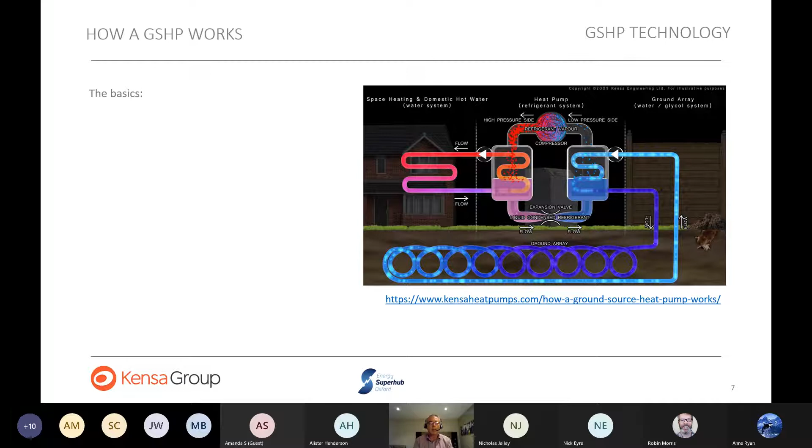So if you were to compare that in terms of standard efficiency, if you think of a gas boiler, for instance, if you're doing really well, for every 1 unit of gas that you put in, you'll get sort of 0.9 units of heat energy coming out. So you'd call that 90% efficiency. So on the same scale, a ground source heat pump would be 400% efficient. Now they do range depending on what you're trying to heat and what heat pump it is. So it's really somewhere between 300 and 400% typically.

As a scientist, having percentages more than 100 can be a bit confusing at times. So they quite often call it a coefficient of performance. That's just the heat out divided by the electricity consumption. So your COP, coefficient of performance, would be between 3 and 4.

The ground then is gradually recharged over time. What you'll normally see in a ground source heat pump system is the temperature dropping slowly through the winter as you extract it out of the ground and use it for heating and hot water. And then during the summer, although you're doing hot water, you normally size a system so that the ground is actually recovering all summer long. And then you just get into this annual cycle of cooling down gradually over the winter and reheating back over the summer. And it's actually diffuse solar energy that's going into it.

So a lot of people will mix up ground source heat pump technology with geothermal, and in America they actually call it geothermal, what we would call ground source. In the UK, the definition is if you're taking the heat from deeper than 500 meters, then it's typically called geothermal. Shallower than that is called ground source.

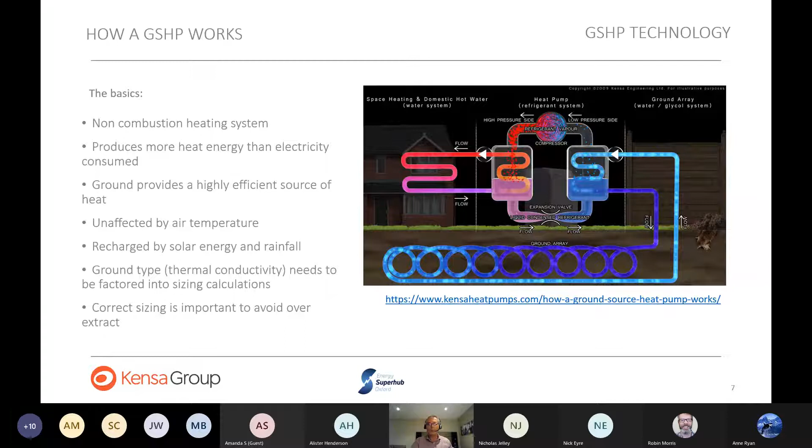And then that's what's used to provide the heating and hot water. It's very well suited to self-build. This is actually cheaper and easier to do when you're putting the system in rather than trying to retrofit. It's often when you're out in the countryside, so you haven't got access to the mains gas.

So for the longest time, and still to a certain extent, mains gas is the cheapest way to heat a property. It's not low carbon, and it's not necessarily healthy, but gas is still very cheap. It's still considered one of the cheapest ways of heating a building. And if you're out in the country, you've got access to a lot more space. So if you're putting in ground collectors, you've got space to do that.

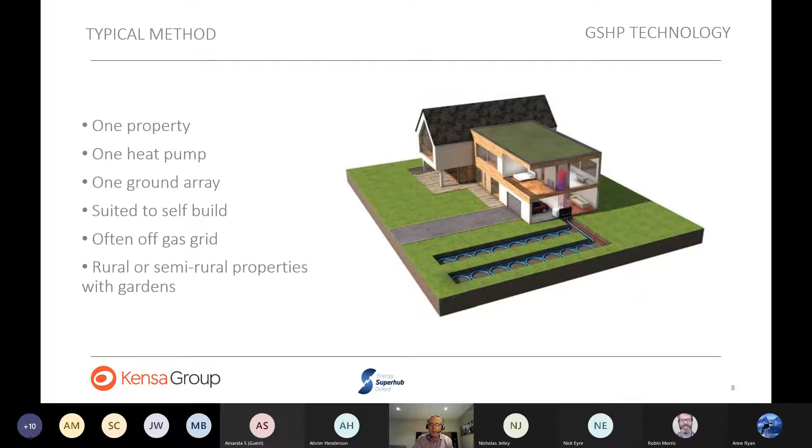So that's the long history of ground source and Kensa from 99 right up until sort of 2012, 2013. All of the systems were deployed that way. And to be fair, it's still quite a popular way of doing it now. However, it's been overtaken in the last few years by something called a shared ground loop array.

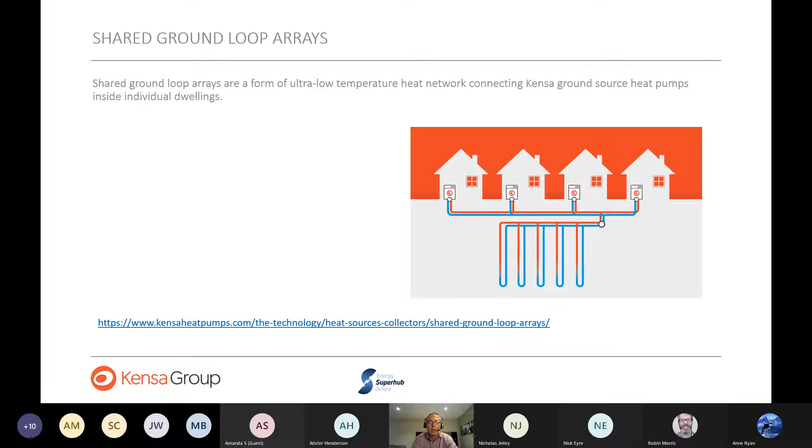And this is where you have a group of collectors, and it doesn't really matter whether that's boreholes or whether it's slinkies or straight pipe or whether it's taking water from a lake or an underground aquifer. There's loads and loads of different ways of getting heat into the network. But the key point is whatever way you choose to collect the energy, ultimately, that's then shared between multiple heat pumps in multiple buildings. Okay, so you can see this example here has 4 properties, each with their own heat pump and connected to 5 boreholes.

When we're doing this in tower blocks, you can sometimes have between 4 and 6 flats per borehole, and they're normally grouped up. So you quite often see a system with 25, 26 flats connected to 5 or 6 boreholes. And it's quite a different way of thinking about it, and there are a lot of advantages. You can scale it up, or you can do it as small as 2 properties.

I've got a system like this in my own house. So my father lived next door, and I've got a field at the back which had a lot of solar in it, and I put very cheap collectors into the field, brought them in, split it off to my house, took it off to Dad's. We have our own heat pump, and that's it. I've got a shared ground array with just 2 properties. Equally, we've got it with hundreds of flats when we're decarbonising tower blocks at a time. So it's a very, very flexible system.

One of the really cool things about it is the heat pumps themselves are connected to the property's own electricity system. So they're just wired into your house like any other appliance. And that means if you whack the thermostat up and open the windows, I don't know why you'd do that, but if you did that, you would then pay more to run the heat pump. So although it's efficient, for every unit of heat you want delivered into the house, you are buying a third to a quarter of that in electricity. So your bill would just go up, and you pay for it in the natural way.

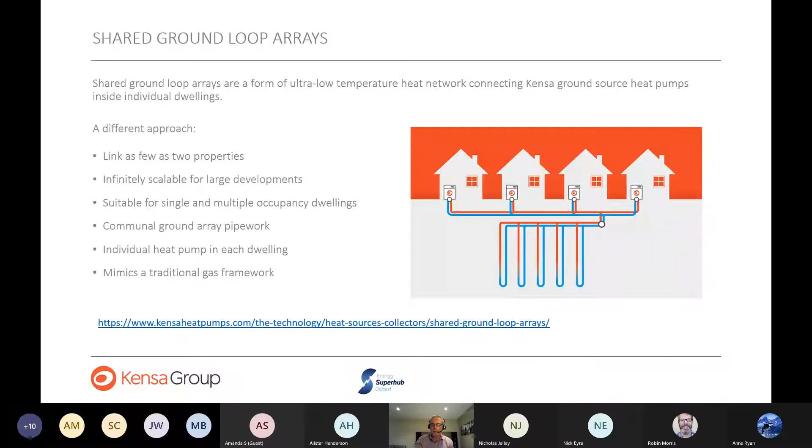So in a gas system, you've got a pipe carrying a low-grade energy, as in a chemical energy in the form of gas, to your white box. A white box then converts that into usable heat, and you pay for what goes into the building. So this is a very similar concept, really, from a financial and business point of view.

There's loads of benefits there, including being very, very efficient. If you're doing the traditional district scheme, you'll be losing heat every time you send it around the neighbourhood. But here, the temperatures we're flowing the liquid in are at roughly the same temperature as the ground, if not slightly below. So a lot of the time you're actually gaining heat while you're sending it around the district, and you're only upgrading to useful temperatures once you're inside the thermal envelope of the building.

A lot of district schemes can actually be, unfortunately, a little bit inefficient, because a lot of the energy they send out of the central plant can get used up by just heating corridors and the like, and the ground, and you have to put quite expensive insulation on it. Whereas the pipework we use here doesn't even need any insulation at all, because it's actually gaining as it moves around. And because of that efficiency, you actually end up with very low running costs.

Okay, so that's what we're doing now. This represents 95%, maybe even more, of Kensa Contracting's work, and over 80% of Kensa's work as a whole. So 4 out of every 5 heat pumps that come out of the factory will end up connected to a shared ground loop array, and we've demonstrated this concept now over several thousand properties, from tower blocks to streets. And if you think about it, a street is just a tower block on its side, or a tower block is just a street on its side, whichever your preference.

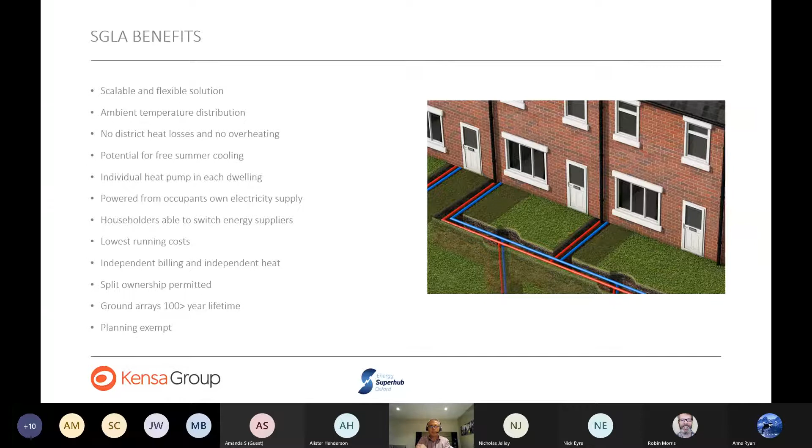So you've got a heat pump that's been shrunk and a hot water storage that's been shrunk, and that enabled this project to go ahead. You can connect the heat pumps to any hot water tanks, but we think this pairing has got particular benefits, especially in flats where space is limited. That's what it looks like.

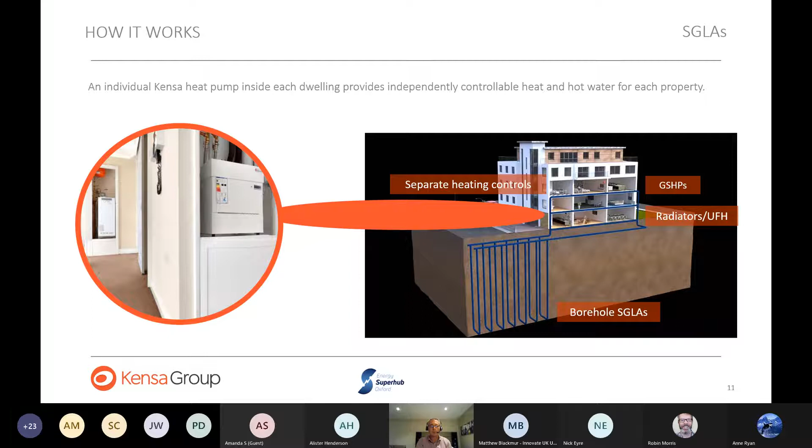So where are we going in the future? We're going to push from shared ground arrays to networked heat pumps. And a lot of it is exactly the same. So the core of it is a network of pipes, property, each building, each heat pump, that are sending heat around the district at low grade, at what we call ambient temperatures, which we're defining as anything between 0 and 20. You could probably stretch it from -5 to +25, full range.

And the key when you're sending heat around the district at those temperatures is that you're not losing it. Because it's ambient, because it's in sync with the ground that it's touching, you're not losing energy when you're sending it around. You're only upgrading it inside the building. So you have an individual heat pump with each property, and that could be a huge heat pump for a supermarket. It could be supermarket cooling, offices, or it could be down to a tiny flat, as we saw in the previous example, which was just a 3 kilowatt heat pump.

And each heat pump that's connected to it is tailored for the building. A lot of the issues you have with district heating is connecting to a mismatch of different buildings. You've got to run the whole system at the temperature needed for the worst performing building. Whereas if you move the heat pump out to each building, you might have one building that you just have to accept running at 60, 70 degrees, and then the building next door, you might be able to upgrade the thermal efficiency of the fabric, or upgrade the radiators and run at 45 to 50 degrees. So you're actually just optimizing for each building as you go along.

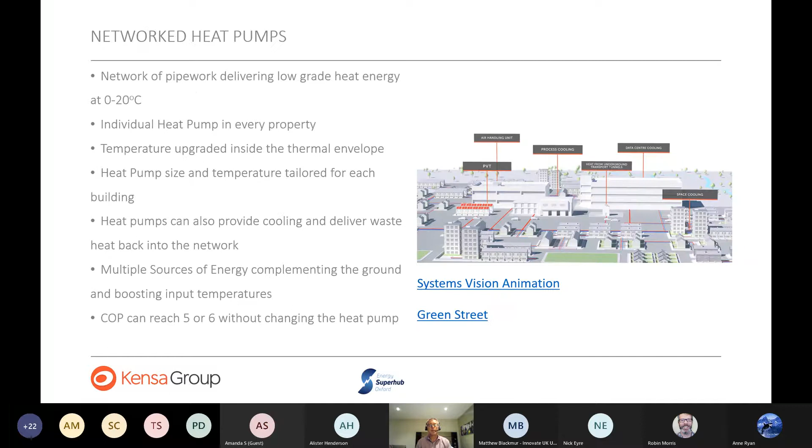Hopefully between the two runs there, slightly different each time, you've got a good idea of what we're trying to do there. The thing that we expect to enable this concept of networked heat pumps is something that we're calling split ownership. And that's where you deploy the infrastructure in the street like you would a utility.

So winding the clock back 100 years, when town gas was rolled out across the UK in the major cities, an investor would come along, put the pipework into the street, and then properties would connect as and when they either got jealous of their neighbours or wanted initially gas for lighting, and then later in the 60s and 70s, gas central heating was connected to those networks.

So it wasn't a case where you had to persuade a few thousand homes to connect and switch over in one go. You put the infrastructure in, and then you put your white box, which we all know as a gas boiler, your energy converter and upgrader, into your home as and when you're ready for it. We think that's the best way to deploy heat pumps, and particularly in our high density cities.

So if you're picturing your Coronation Street style streets where you've got lots and lots of rows and terraces, it's very difficult to see how you're going to get a traditional ground source or an air source heat pump into those properties. But if we came along and put boreholes up in the street, use the streets themselves as both the source of heat and the way we distribute the energy, then you can just see 2 pipes coming up to your front gate with a connection to your district.

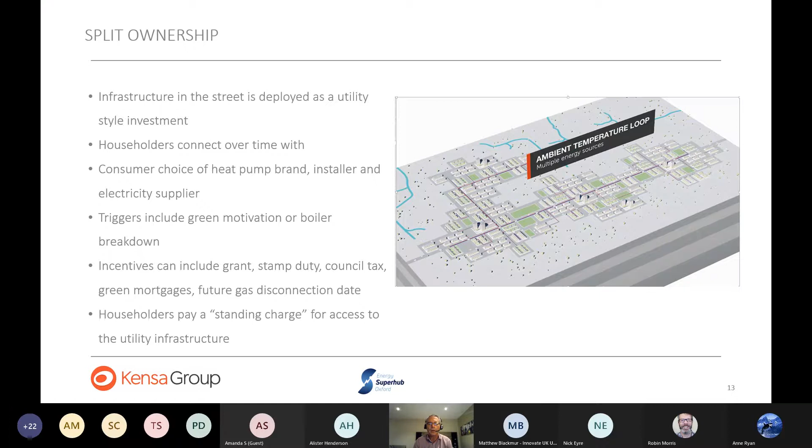And the project we're working on is part of the Energy Superhub Oxford, and I think Tim gave you a good overview of that. But as a quick refresher, this heat is part of that larger demonstration, and it's looking at local energy systems, so particularly the electricity system for balancing the grid, electrification, in this case of transport, and electrification of heat via ground source heat pumps, and it's in the Oxford area. The heat side of things is down on the Blackbird Leys estate, southeast Oxford, and we have

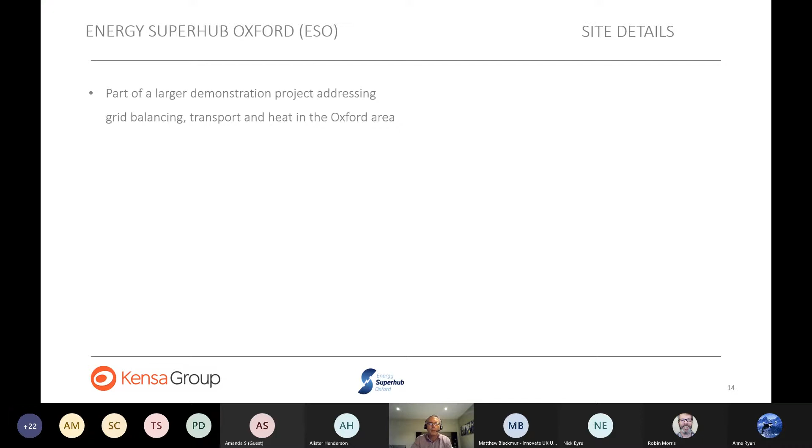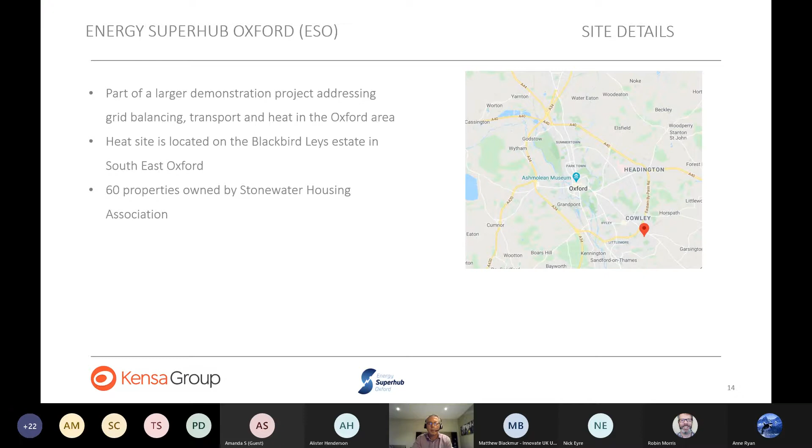We put in a shared ground array system using boreholes, and this is a Google Earth shot showing the schematic and the location. So each of these purpley pinky spots is a borehole of around 90 to 100 meters deep, and you've got an array here, 1, 2, 3, connected into a manifold that's feeding these flats here, another 1, 2, 3 feeding these flats, 1, 2, 3 there. So there's 3 separate shared ground arrays feeding, I think in this case, 12 flats.

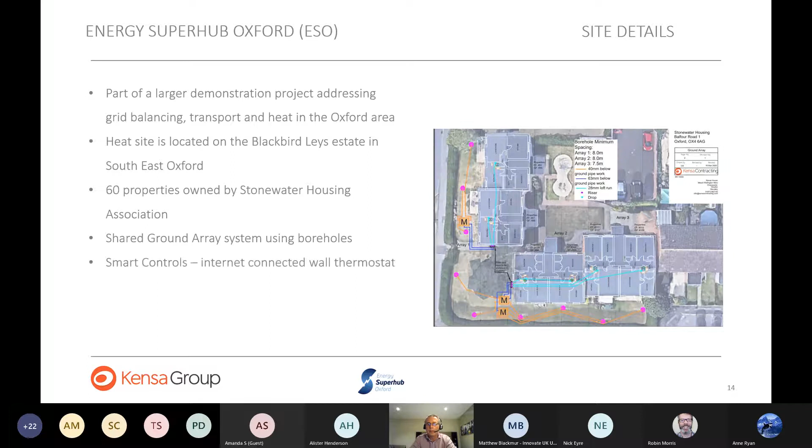The different thing we're doing in Energy Superhub Oxford and Blackbird Leys is we're putting in smart controls, and smart in this case means internet connected, an internet connected wall thermostat. Now I'm a big skeptic of anybody saying anything connected to the internet is automatically smart. So it's really the internet connection that allows us to do smart things with it, rather than it being smart in its own right. But that is a crucial part of it. We need to be able to analyze what's going on in these properties externally and remotely.

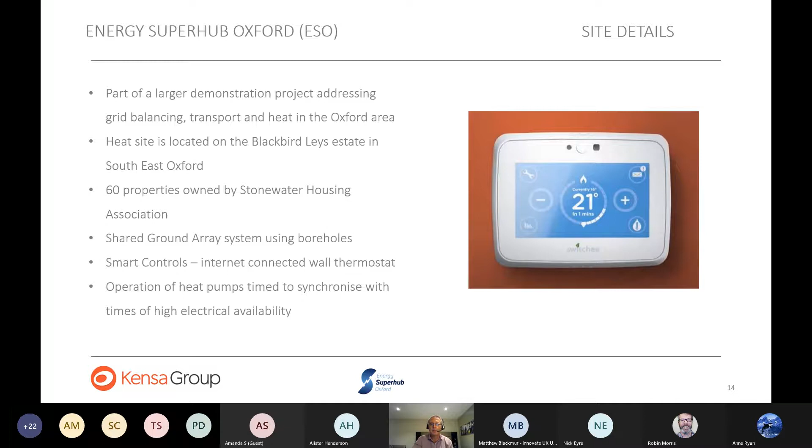And what we're doing is we're optimizing when the heat pump turns on and off to synchronize with the electricity grid. So there are times when electricity is actually quite plentiful and relatively cheap, and there are times where the grid's under strain, everything's struggling, the price goes up, and the carbon intensity actually goes up. So we're operating these heat pumps at a time when the electricity grid can best accommodate it. Now, this is a graph of the price of electricity averaged over a whole year. It's actually 2017 to 2018, using a tariff by Octopus Energy called Agile. And you can see there's a peak in the morning, and then there's a really big peak in the afternoon.

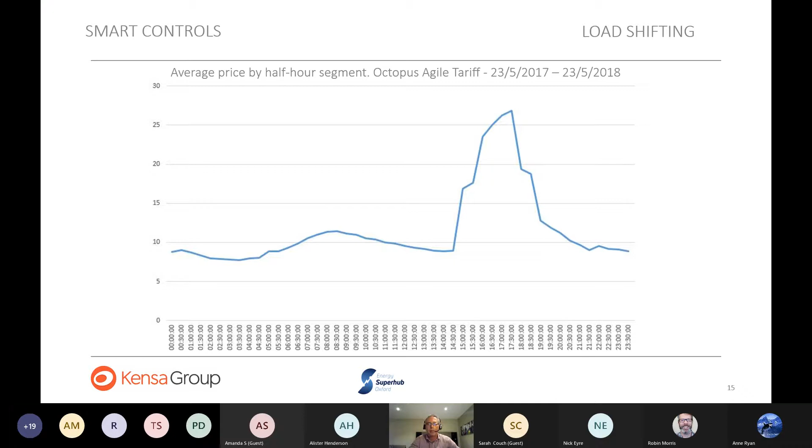So if you're a person that likes to come home at 5 o'clock or 5:30 from work and have your house warm, if you've got a gas system, you might set your boiler to come on at 4 or 4:30 and gradually warm the building up. As we can see, electricity is a lot cheaper here at 2 o'clock in the afternoon. So our system will understand that. It will turn your heating on at 1 or 2 o'clock, and it may actually get it a little bit warmer than you would normally have. So if you normally like it at 21 degrees, it may get it to 22 and then just let it cool down to the perfect temperature as you walk through the door while the electricity price is high.

It might say, while electricity is expensive, let it drop down a little bit to 20.5 or even 20 while you're there, and you know electricity is expensive. And then as soon as you come out of the high price, it'll bring the heat pump back on and turn the temperature up again. And you can do that a little bit in the morning and a little bit in the afternoon.

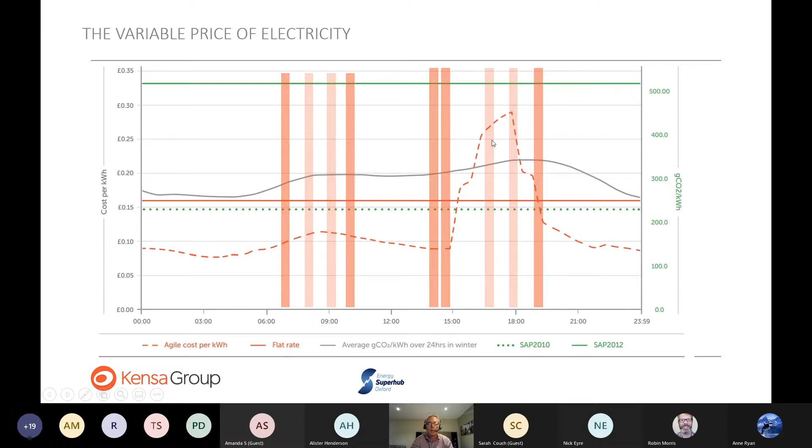And in terms of financial savings, the residents can save anything from 25 to 40%. And for the first time, we think we can actually make heat pumps cheaper than mains gas. Ground source competes pretty well with mains gas. In some situations, it can be pretty much cost parity. But by switching over to a variable tariff and doing this load shifting, we can actually get daylight between us and mains gas.

We're working on 5 extra properties that we're going to install this year that are going to not just use the fabric of the building. We're actually going to have some local heat storage. So the phase change hot water tanks, we're reconfiguring those to store energy for heating, and we'll be able to shift 2 to 3 hours worth of heat, but not by 2 to 3 hours this time, but by 12 to 18 hours. So we'll be moving them from 5 in the afternoon to 2 in the morning, rather than 5 in the afternoon to 2 in the afternoon. We get even more benefits then.

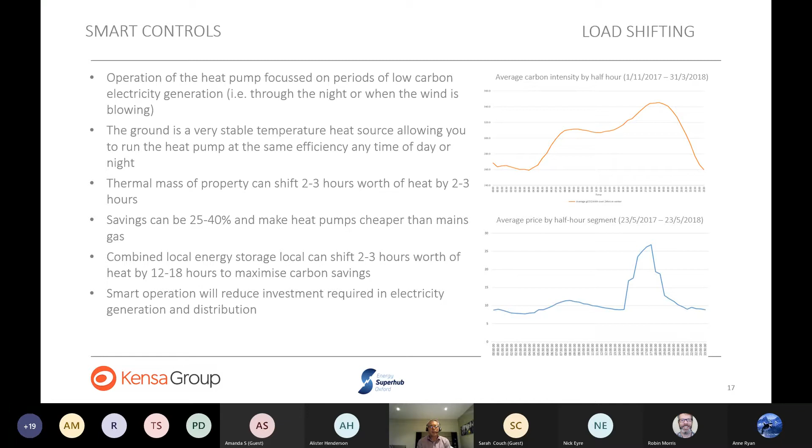So hopefully that's given a little bit of a flavour of what we're doing, both in the future and specifically in Oxford. Open up to any questions you might have.